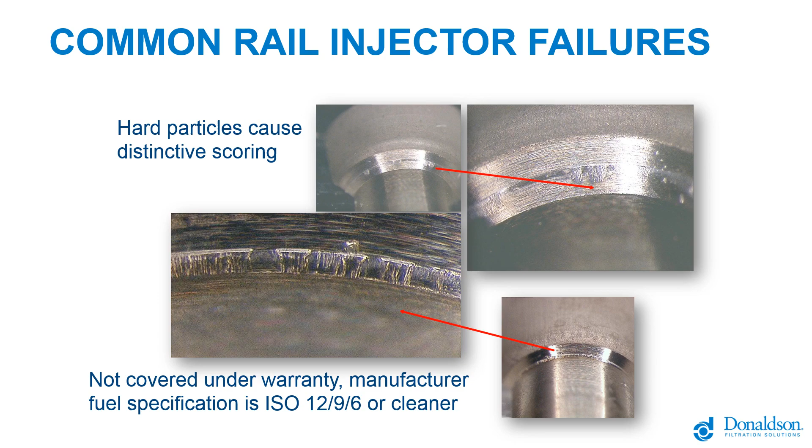The industry, when these types of fuel injection systems were being first released into the market and developed, came up with a position statement to describe and handle the new requirement for cleanliness fuel and how things need to be kept in order to maintain warranty and proper operation. The takeaway is that it's the responsibility of the equipment user to ensure that fuels are compatible with the fuel system, and by that they mean cleanliness.

As you might know, there's a fuel spec, an ASTM fuel spec. Most people attribute D975 for fuel quality, and what this position statement is effectively saying is that regardless of the ASTM spec, which is, for all intents and purposes, a little outdated for these new engines, it's up to the end user or the fuel supplier to clean that fuel to ensure there's no downtime events due to fuel quality.

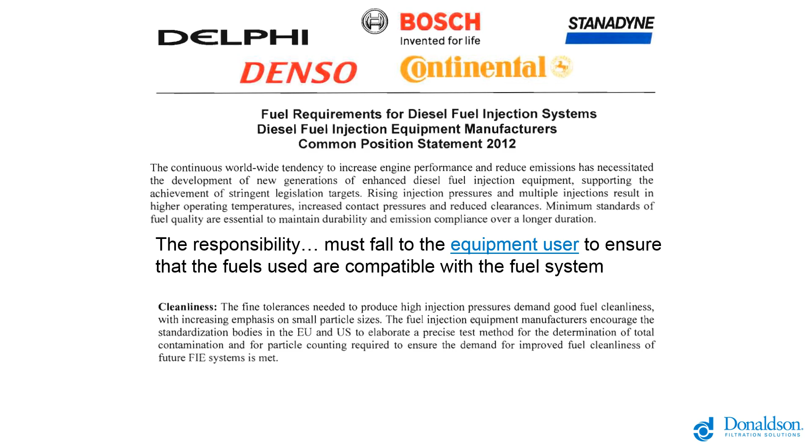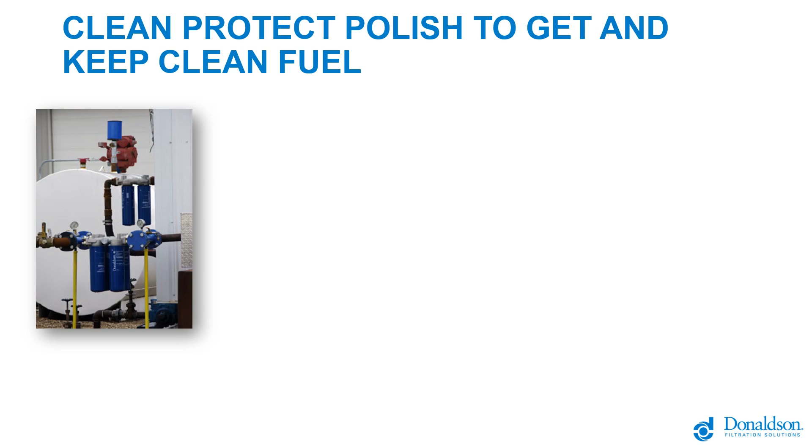So how do you get to be operating at this new level of cleanliness overall? If you just continue to do what has always been done, you're likely to have issues. There needs to be a significant change in handling practices and behavior to get there. We've come up with a simple strategy called clean, protect, and polish to get your fuel as clean as it needs to be, before you need to use it, so that you have time to react if there is a fuel issue, and to maintain operability.

That's done by cleaning the fuel when you take possession of it, if possible, so offloading from a fuel truck into your tank infrastructure, if you do own your fuel infrastructure. That gives you the most time to react to an issue and to detect fuel quality issues that might impact your operation at the time you're taking possession of that fuel. You're buying the fuel off of the fuel truck, and it's yours as soon as it's in your system, with no real significant quality test there at the time it gets transferred into your system.

So putting that into clean fuel tanks, make sure they're clean to start with, not 15, 20 years and never been maintained. They should be clean to start with. Put a breather on that tank so outside debris does not enter the system when liquids are pumped out of those tanks, and polish that fuel on the way out, basically going through the same level of filtration that was on the inlet side on the outlet to ensure your fuel is very clean and should not cause operational issues.

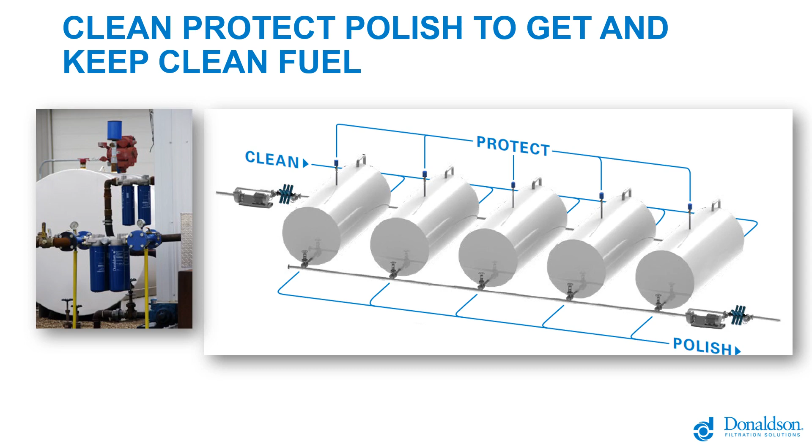In summary, there are 3 types of contaminants, three categories: hard particulate, water, and insoluble chemistry in the fuel. If you approach your fuel infrastructure in this manner, you can effectively eliminate those issues from ever getting on engine in the first place.

So the needed filtration results, just to go over what things typically look like and what you need to achieve. This is a fuel sample from a small 500-gallon tank that was sitting out in a parking lot for a couple of years, with dust blowing into it and very little fuel usage. It wound up with a ton of fine particulate in it.

We won't get into the full description of an ISO cleanliness count, but this is not an unusual fuel quality for fuel as people have historically maintained it. The new standards require it to be clean enough for your fuel injector, so virtually all that particulate needs to be removed with filtration.

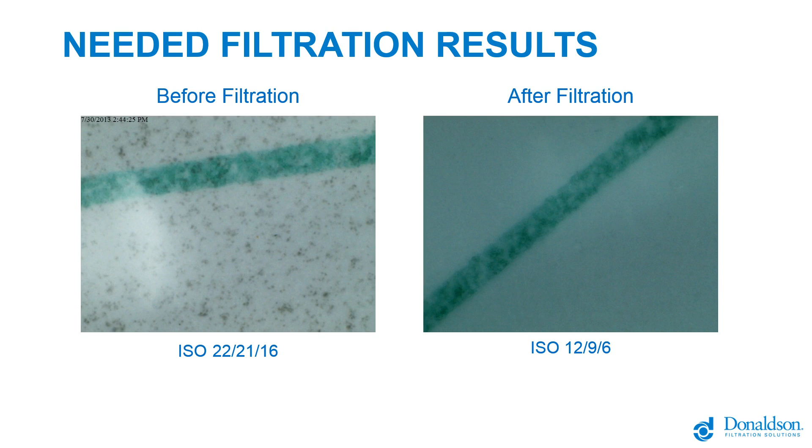Typical dispenser filtration in the marketplace, at the bulk level around 30 microns, will remove almost none of that particulate. It will just pass right through the filter, which will last forever. All of that work needs to be done by a filter somewhere, and it's best not to leave it all the way to the secondary filter on the engine system.

So now on to best practices for lubricants. There's been a lot of technology development and system design changes over the years that require cleaner fluids, and just assuming fluids are clean on delivery is not the best way to maintain clean fluids in your hydraulic system and gearboxes.

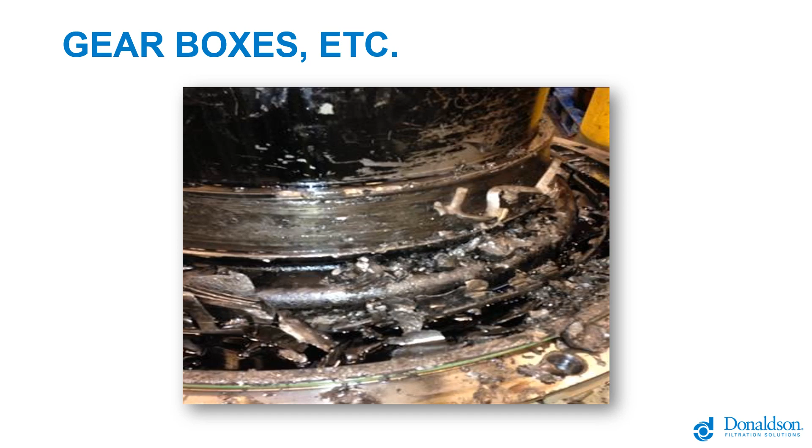Gearboxes, if run dirty, can typically run very dirty. If they're an older gearbox or rear diff, there may be no filtration whatsoever, or very coarse filtration, and it won't maintain a cleanliness level that prevents wear and damage eventually. You can essentially stop wear and damage if you clean that fluid up properly.

Probably the most sensitive components in your hydraulic circuit, nearly as sensitive as your high pressure common rail fuel injection system, would be servo valves and control valves on equipment. There are very tight tolerances in the spool, and you need to maintain cleanliness so things can slide and move properly for good control.

So for decades, the hydraulic circuit was the most critical circuit for filtration cleanliness because of the pressures. Averaging anywhere from 3 to 10,000 psi working pressure, that fluid needs to be extremely clean for tight tolerances, removing any foreign contaminant.

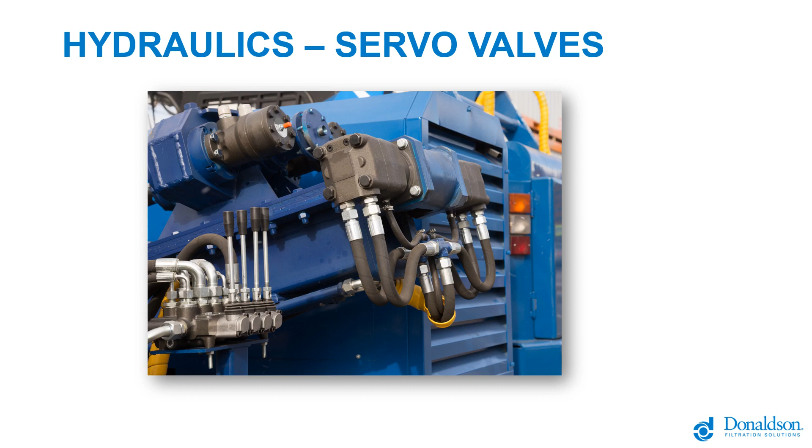The theory and method is similar for lubricants as it is for fuel. However, there are significant differences. At ambient condition, hydraulic fluids and engine oils, gear oils are quite thick, high viscosity, and you may need much larger filtration than you would for a similar flow rate or volume of fuel, just due to that viscosity change.

You need to select the correct level of filtration to achieve the cleanliness targets specified by OE manufacturers. When we size fuel filtration, we typically size it based on flow rate and quantity of volume used. When we size lubricant filtration, we really have to look at the viscosity change because it's so dramatic.

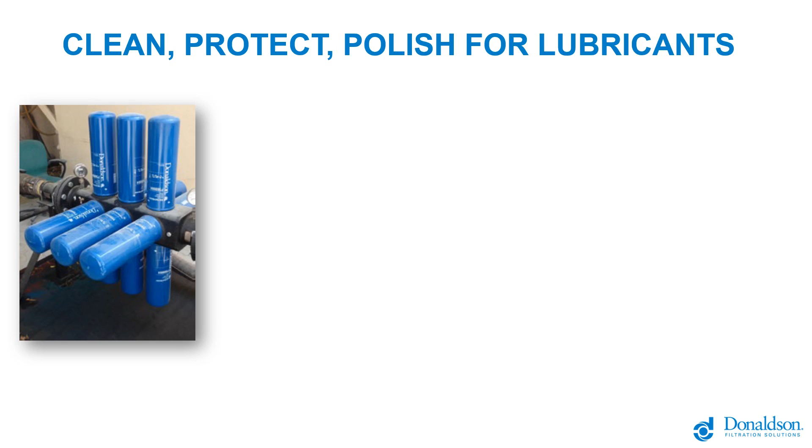In this case, you're seeing an I-12 manifold, which would typically do 600 gallons per minute on diesel, but might only do 30 to 80 gallons per minute on heavy cold engine oil.

Similar to the fuel situation, putting clean lubricant into a clean tank and protecting it with a proper breather. Here's a trap breather that keeps particulate as small as 3 micron out of the system and helps manage water, and then filtration again on the outlet side.

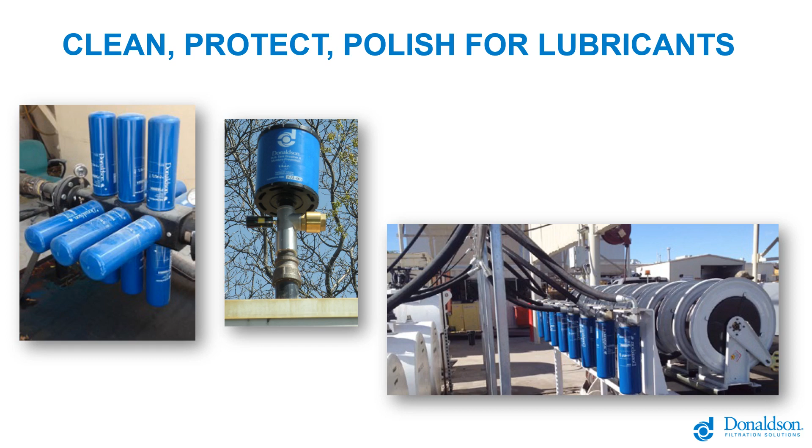This is a low pressure, higher flow dispense set of hose reels off of a lubricant farm. That's fine for pressures up to, say, 350 psi of pumping pressure or shutoff pressure.

But more common on the lubricant side are stick pumps, which are high ratio air pumps, 3, 4, 5, 6, or 10 to 1 air pumps, and you can get pressures in operation or at steady state of 1,000 psi, requiring a higher pressure filter.

As a safety note, due to thermal expansion, where oil increases in pressure due to higher temperatures, it's recommended for these outlet systems specifically that thermal relief valves are installed. That's now a requirement by virtually every manufacturer of those style of pumps, and it's a pretty common issue with those systems.

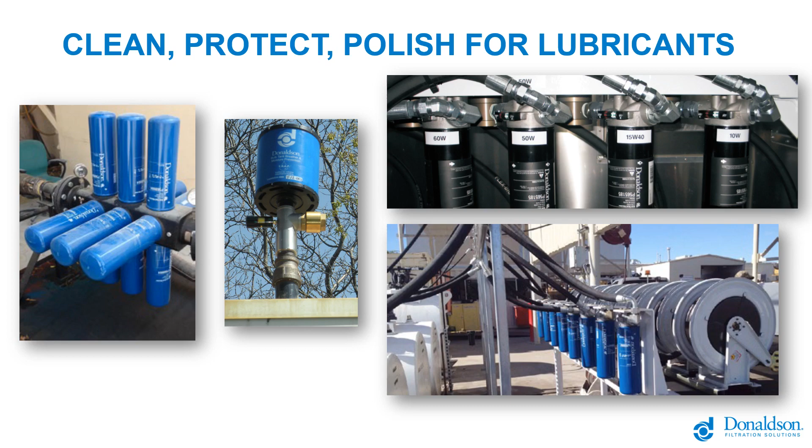So this set of filters there on the upper right, the black cans you see, are designed for 1,000 psi service with a 2,250 psi burst pressure, so they're suited for that application.

And if you get the chance to design a system from scratch, you may be able to incorporate all the best practices we've covered here into one system and do it very cost effectively and neatly.

This is a set of lubricant tanks at a repair facility. They've used a dual head to not only filter oil coming into that tank, but with just switching some valves, you can recirculate that tank. Notice they are cone bottom tanks, meaning there's nowhere for debris to collect. All debris settles to the bottom of the cone and is pumped directly to the filters, so the tank stays clean all by itself.

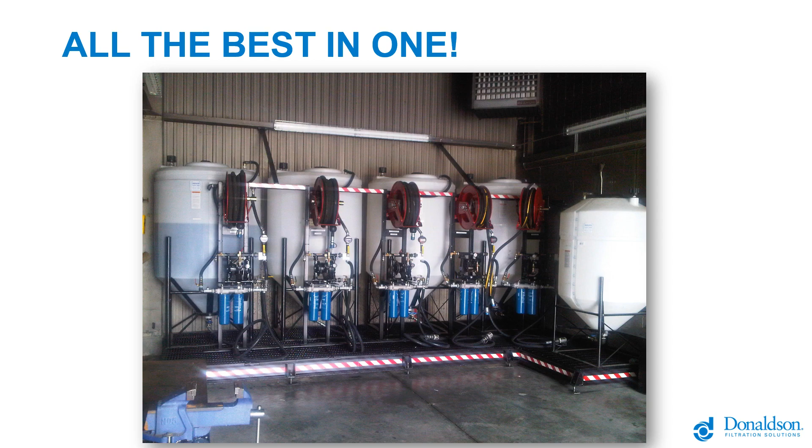You'll notice there's a small industrial trap breather on top of each tank to protect it from water ingression and particulate. And with just a switch of some valves, that same pump and filters can do the filtration on the way out. So that covers all the best practices in one very simple, compact system.

The question of kidney looping comes up with lubricants, but not really with fuel. High volume fuel users typically aren't holding a large volume of fuel long enough to kidney loop it for filtration. It's much better to filter at transfer into the tanks and then out as you dispense into equipment. But for lubricants, it's a recommended best practice by many OE folks, and it's common across the industry, that people like to kidney loop a tank.

You need to turn that tank at a flow rate high enough to actually stir the dirt around. As mentioned earlier, getting the dirt to the filter is how you get the fluid clean. If you run too slow a flow rate, you won't turn the fluid over enough to get the dirt to the filters, and you'll have a hard time getting the tank clean. Provided you're at a proper flow rate, 5 to 7 turns of that tank will give you a decent chance of getting it down to your cleanliness target.

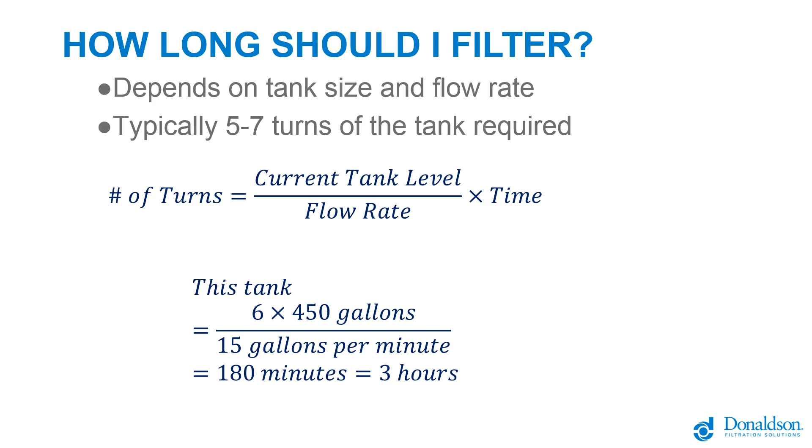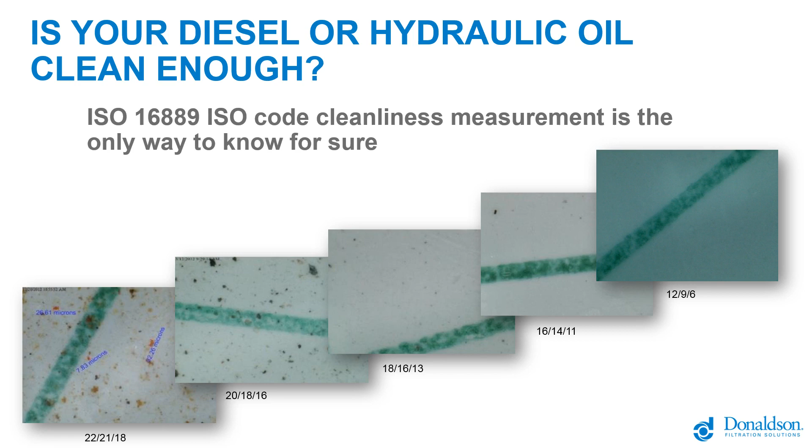20-18-16 is pretty average fuel cleanliness, and that's still too dirty to run in most applications. 18-16-13 is typically the max contamination most OEs spec for even engine and gear oils. 16-14-11 is a common target for hydraulic circuits, transmissions, that kind of thing. And again, fuel circuits need to be very, very clean. You basically have to remove all particulate, down to an ISO code level of 12-9-6. So you can see the dramatic reduction in contamination there. And the higher the pressure of the system, the cleaner the fluid needs to be.

So we're going to change gears. We've highlighted a lot about fuel, what's changed, how clean things need to be, and what fails when the fuel's dirty, and the same for hydraulics.

Now we're going to talk about the value of adding filtration. Obviously every time you make a change, it takes time, energy, and resources, and you have to justify making those changes. So the value proposition we're looking at is reducing operating expense, reducing downtime, ensuring against supply problems, and keeping your infrastructure clean.

One example that's easy to wrap your head around is a tanker truck of fuel, anywhere between $25,000 and $30,000 investment. And when you take possession of that tanker truck of fuel, it becomes the end user's problem. So it's about ensuring that the fuel that makes it into your infrastructure is clean and dry and free of contamination.

This allows you to get the lowest total cost of ownership for your equipment, making sure it's running at peak performance and peak efficiency. Some signs that you're having fuel quality problems are filters plugging prematurely, a loss of horsepower, multiple regens, your fuel economy might go down, and your engines might be throwing codes.

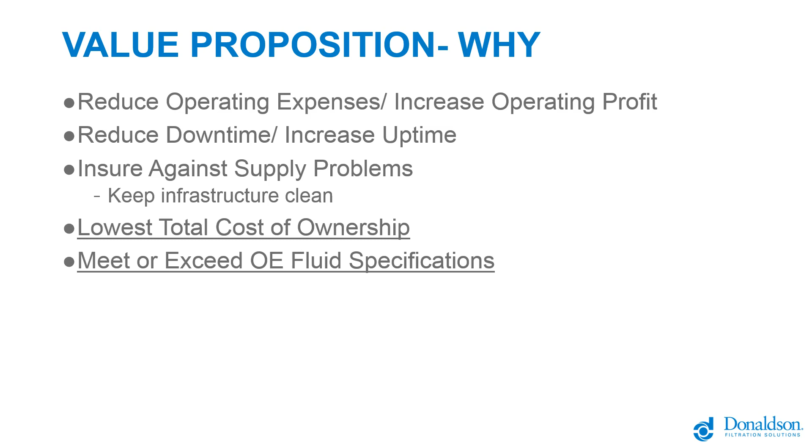And so what we're trying to do here is just meet or exceed the OE fluid recommendations.

We believe that the best return on investment is your diesel, and if you're using mobile hydraulics, number two is hydraulics, and that's just a function of the pressure that they're operating at. So every OE has different cleanliness recommendations that we showed visually on the patch test in the previous slides.

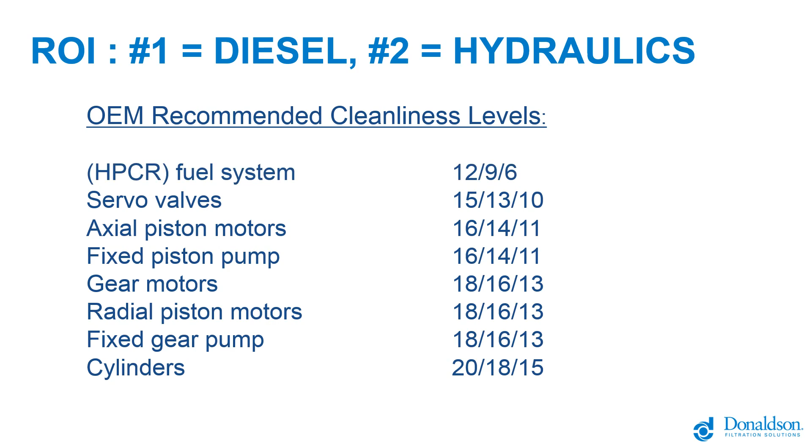Most of them are around 18, 16, 13. Some of the higher pressure hydraulic circuits get into the 16, 14, 11s. Typically servo valves were the highest pressure for decades at 15, 13, 10. And now with the high pressure common fuel rail, they're asking for 12/9/6 at the injector, which is effectively too clean to measure.

So as the tolerances get tighter, as the pressures get higher, the filtration needs to be tighter. They say for the new injectors, if you take the injector apart and hold it in your hand, the heat from your hand is enough to expand the metal such that you can't put it back together again. So we're talking about 2 microns. That's the size of a bacteria.

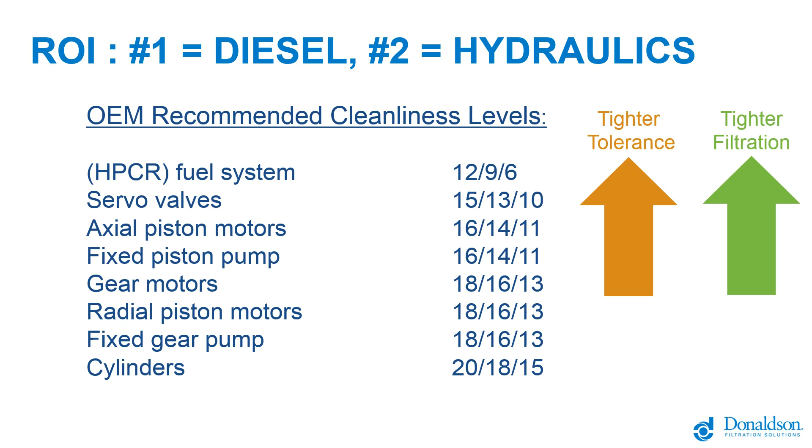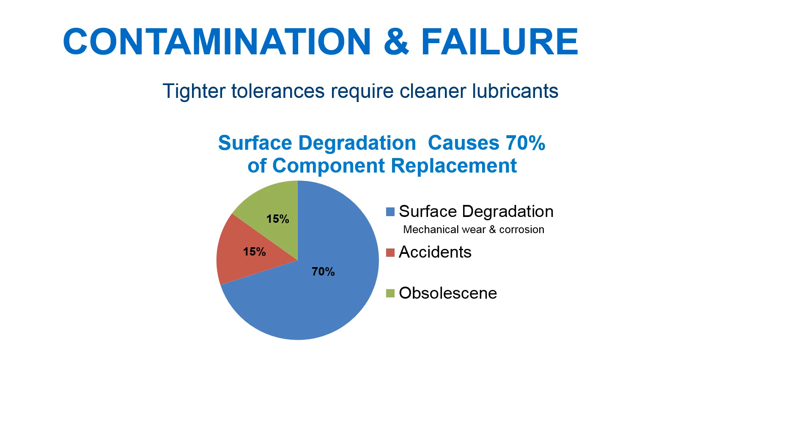So we saw in a couple images the gearbox failure. How do those failures occur? 70% of those failures occur due to surface degradation. What that means is you have 1,000 particles in the system that were maybe added because the hydraulic, the diesel, or the oil wasn't filtered before it was added. Those 1,000 particles enter the system and cause more physical degradation of the surfaces in there, and those 1,000 become 1,000,000, those 1,000,000 become 1,000,000,000, and then all of a sudden you have failure at typically the lowest, tightest tolerance location.

So we ran some numbers, and if you take a pump running at 25 gallons per minute, if you add in oil that's 22, 21, 18, it represents 600 pounds of dirt running through that pump over a 6-month time frame. Now it's not truly 600 pounds of dirt, it's just the equivalent of 600 pounds of dirt that pump has seen, and with proper filtration, getting that down to a 16, 14, 11 for instance, we can drop that 600 pound equivalent down to 5 pound equivalent in that same time frame. And it'll do less wear and less damage.

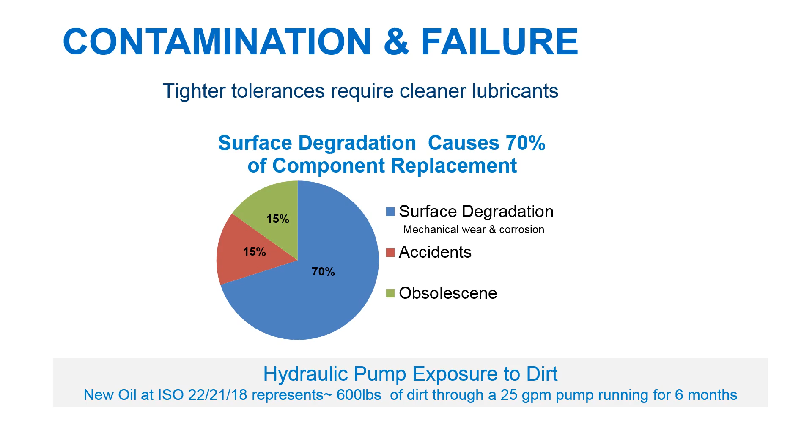And now we're going to talk about some market trends in diesel specifically. This is an article from 2014 published by Heavy Duty Trucking Magazine, and it physically points out that the majority of maintenance spend is coming on the new high pressure common fuel rail circuit and fuel pumps. And we see that in North America alone it's a $3 billion a year business, and globally close to a $10 billion a year business.

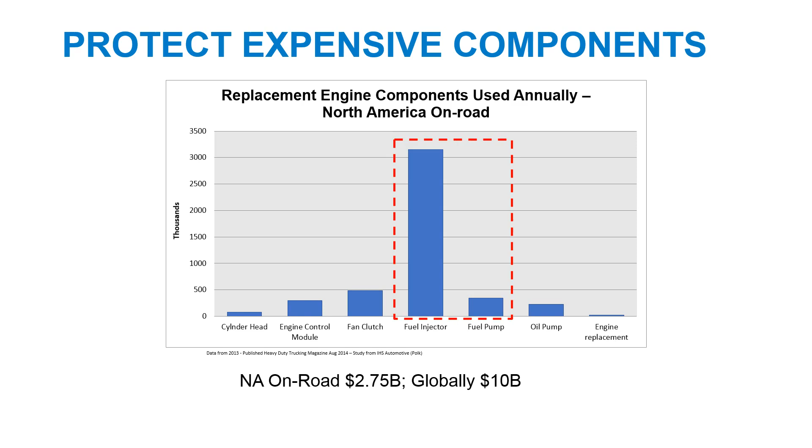So what we're trying to do is make those bars lower by pre-filtering the diesel before it goes on the engine in the first place.

We're also hearing from our customers that the average injector repair is costing anywhere between 8 and 10 grand, depending on the number of injectors and the downtime. But more importantly than that physical cost is sending a second truck to finish a job, a second crew. A lot of our over-the-road transportation people get paid on on-time deliveries, and when you don't do that, you're hitting your bottom line. And for rental companies, sending out a second truck or having effectively more trucks in your parking lot that aren't being fully utilized.

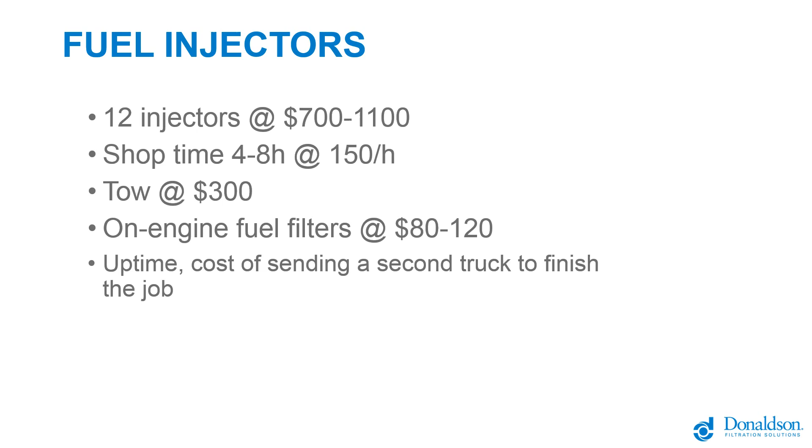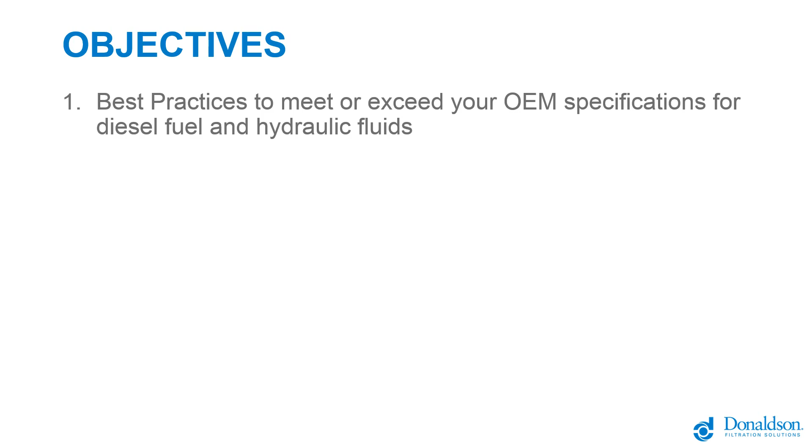So just to recap again, it was to cover the best practices to meet or exceed your OEM specifications for diesel fuel and hydraulic fluids. I think we covered what's typical out there is far too dirty to meet those targets, and practices need to change if you've got new equipment to make sure you're on those targets. A little bit of discussion on the cost of doing things and the various things that need to be considered when calculating the ROI for improving the uptime and operability of your equipment.

When it comes to improving your fuel and lubricant infrastructure, it's a big benefit. And then just a little bit about the trends in diesel-powered equipment. There's really no going back to old ways of handling practices and expecting to have good operability outcomes.